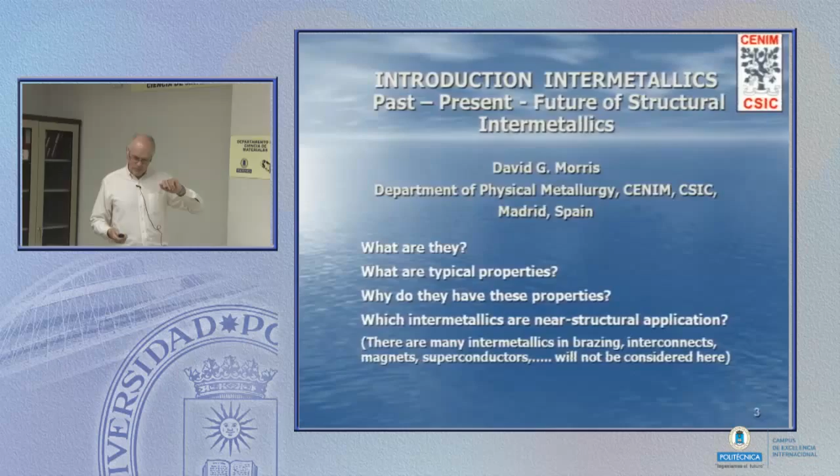Potted, English first of all. Potted means a little bit like what you put in a jar of marmalade - you take the chunks and throw them in, and everybody's contained within that environment.

What I want to do today is go back over the last 50 years, but especially the last 20 or 30 years, and discuss what's happened with intermetallics. Intermetallics has been one of the most interesting scientific and productive areas over the last 20, 30 years.

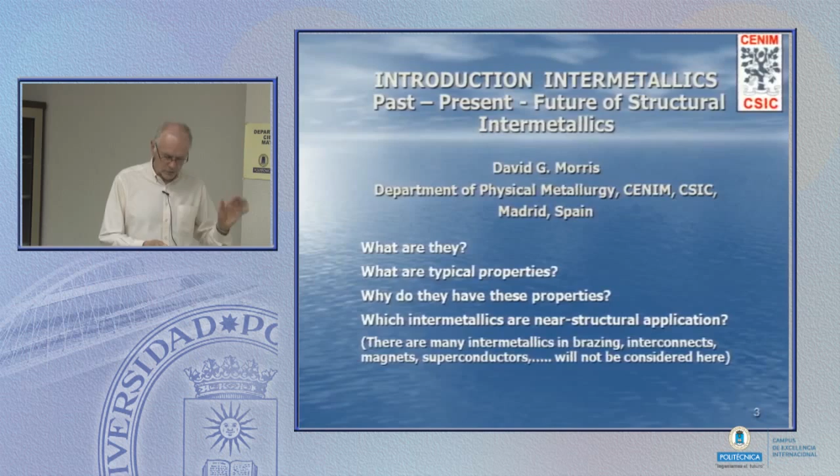I'd like to start with a brief description of what we mean by intermetallics, what are typical properties, why do they have these properties, and then look at a couple of intermetallics which are really close to or already in applications as structural materials. There are many intermetallics used for their physical properties - superconductivity, conductivity, etc. - but I'm not going to talk about those here today.

What are intermetallics? You all know about these gamma-gamma prime superalloys. In a gamma-gamma prime superalloy, you've got basically a nickel matrix, an FCC metal, and inside a very high volume fraction of precipitates called Ni3Al. Looking at the phase diagram, it's a mixture of the gamma FCC matrix with Ni3Al.

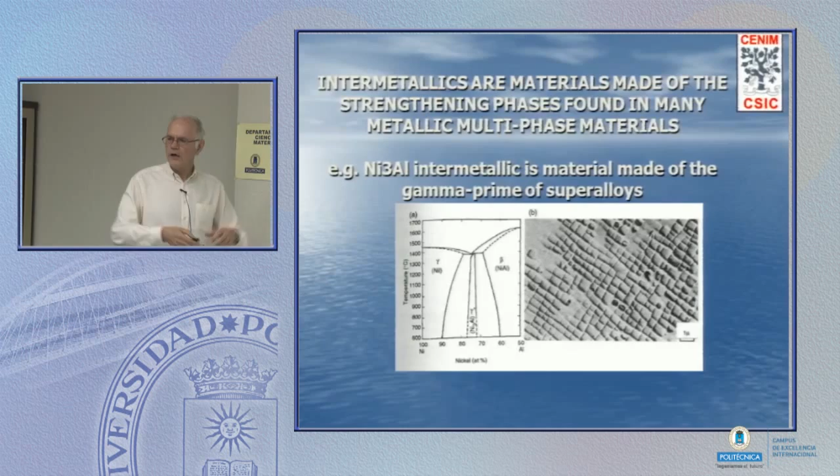What we're going to be talking about today is taking the material of the precipitates, and that's going to be our bulk material. Now, when we mix two elements A and B, a number of things can happen, and it all depends on whether you want to form AB bonds or not.

If I mix atom A and atom B, and they really don't care whether they are next-door neighbors or not, you'll get a disordered solution - that's what you've got in most conventional metallic materials, like aluminium alloys and steels. If you don't want to form AB bonds, preferring AA and BB instead, you'll have some sort of phase decomposition into an A phase, a black phase, and a white phase.

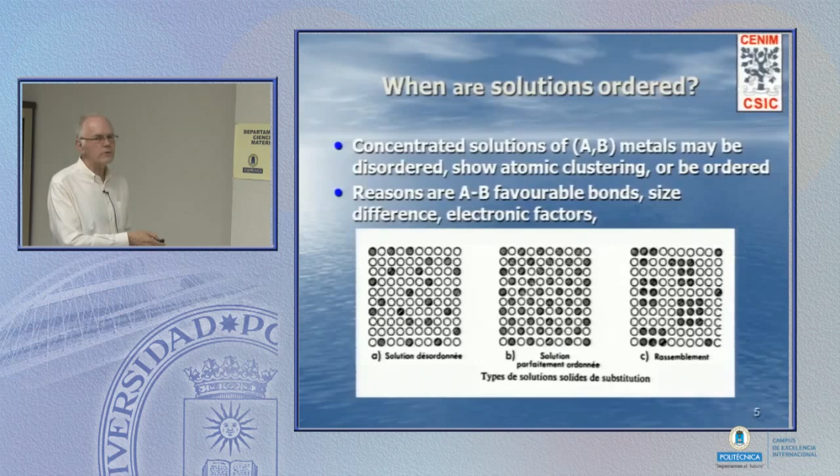Whereas if you do want to form AB bonds, the way to do it is to order the atoms, and the reason for the ordering can be size-related or electrical or electronic. A large atom wants to have a small atom as a neighbor so they can fit together spatially. So if we want to form AB bonds, we're going to get an ordered structure.

Now, a couple of definitions. Intermetallic compounds, strictly speaking, are those which remain ordered up to the melting point - they're strongly ordered and don't want to disorder in the crystalline state. Ordered alloys are alloys which at low temperature are atomically ordered, then they disorder, and only somewhat later, at a much higher temperature, will they actually melt.

A second definition: Daltonides. Many intermetallic compounds were discovered by chemists in the 18th century when they were mixing metals together and finding strange properties at strange compositions. Dalton is one of these famous chemists, and he found that at certain strict chemical compositions you would have a sort of chemical reaction and form a compound with a well-defined chemistry, like A3B2, and so on.

There are many others called Berthollide compounds, where you can have a wide range of chemical compositions and still maintain the ordered structure. Now today we're going to mix all these together and call these intermetallic compounds.

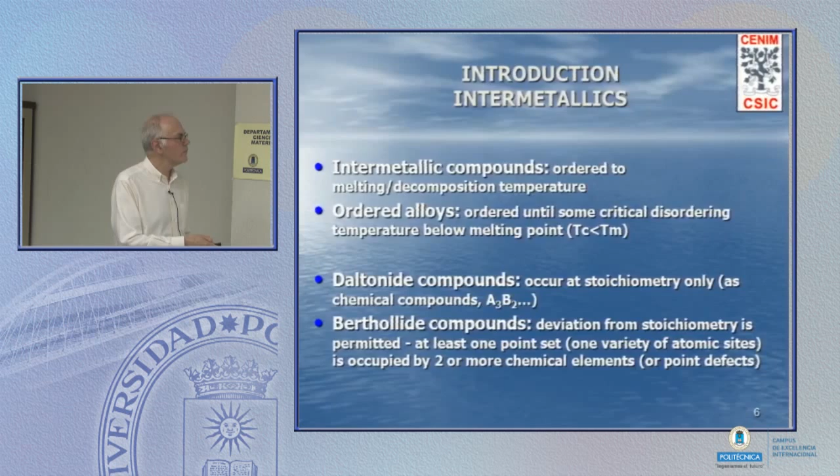If we look at a couple of examples of phase diagrams, this is the nickel-aluminium phase diagram again. Here's the nickel end, solid solution nickel. Here's the Ni3Al intermetallic. You see it exists over a fairly narrow composition range and is ordered all the way up to melting. Here's another compound, the NiAl. It's got a different crystal structure, a different phase.

It's ordered over a fairly wide composition range, again all the way up to the melting point. It's very strongly ordered. If we contrast with the iron aluminide, here's iron aluminium. Here we've got the FeAl phase region, ordered up to about melting over a wide composition range, very much the same as NiAl. But in this case, at Fe3Al, we've got another phase which exists over a moderately wide composition range, ordered only up to about 550 centigrade.

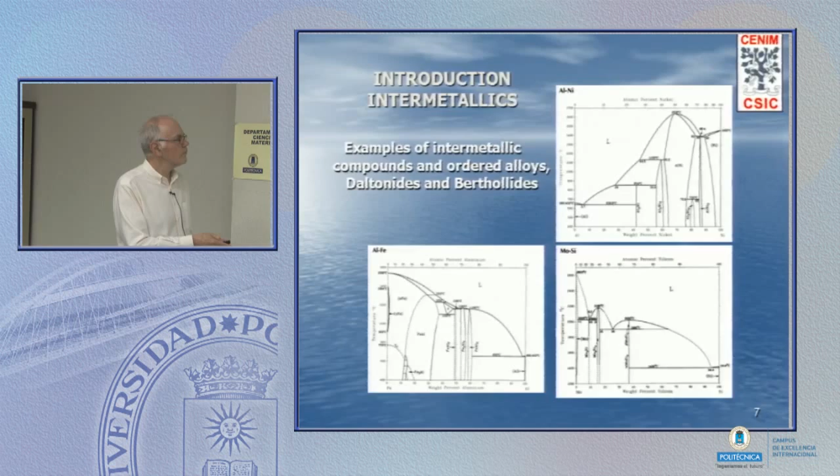Okay, now let's look a little bit further. Let's look at the electronic structure inside, and what we're going to say is that the intermetallic is sort of halfway between the metal alloy, the disordered metal alloy, and the ceramic.

Now inside a typical metallic alloy, you're going to have a positive ion, the nucleus, with electrons in circular or spherical symmetry around it, and then you've got a cloud of electrons that are free to move, that give you conductivity. Inside the intermetallic, here we've got the ion in the center in the same way. We've got a cloud of electrons.

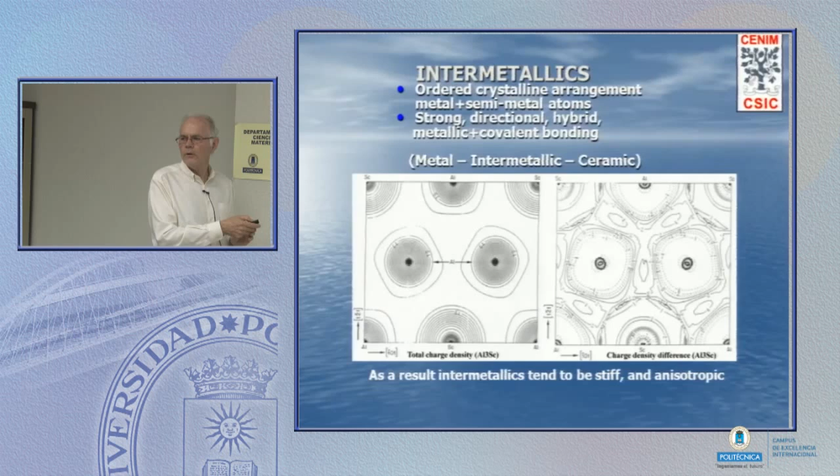These are still metallic alloys. They conduct heat and electricity. But what you see is that we're no longer circularly spherical symmetry. We've got a stiffening of the bonds and a directionality of the bonds. So we are, as you see, in between metallic, non-directional, rather weak bonding, and ceramic, ionic or covalent, strong directional bonding. We're sort of halfway in between.

Now if we look at the crystal structure, here's the BCC crystal structure, which you would find of iron, of steel. In that case, each atom would have the same identity. And this vector from the corner to the center, the half 1,1,1, is the easiest vector of shifting. That's the vector of the dislocation that carries out deformation.

Now in the ordered cell, we've got iron on the corners, aluminium in the center. A half 1,1,1 vector takes a black atom to a white site. It disorders. And the crystal doesn't like that. It likes to stay ordered.

We've got two alternatives. We can double up. Instead of having a half 1,1,1, we have a full 1,1,1 vector. Or we can go to a 1,0,0 vector. In both cases, they're larger vectors. Energy of dislocation goes with B squared. So they're much more energetic. They're more difficult to produce.

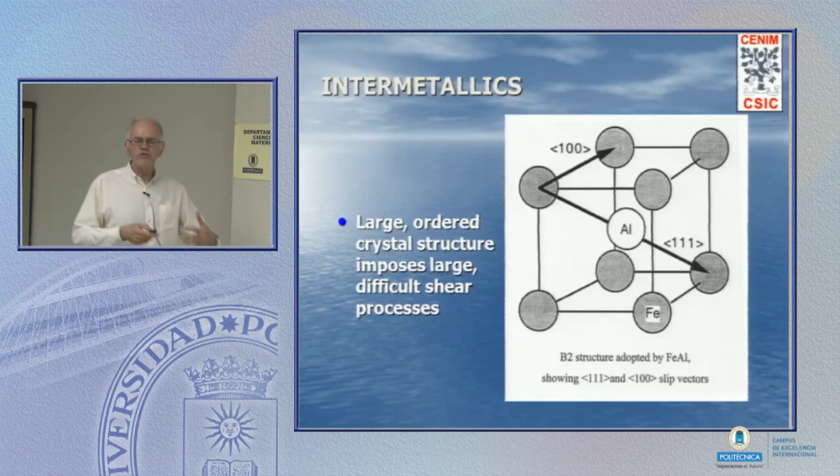And what we've seen is that here's an AB ordered matrix. Here's one dislocation, and ABAA. This is the disorder behind it. What do we do? I couple the one dislocation with a second one that repairs the order. And this is the super dislocation.

Now there are various types depending on the precise crystal structure and what sort of stacking fault. It's very much the equivalent of two Shockley partials with a stacking fault in between. The type of dislocation I get depends on the precise crystal structure, but in all cases the core of the dislocation is now not a point object, it's a planar object. You can think of it as a ribbon in three-dimensional space, which means it's more difficult to change plane. Things like cross-slip, moving a dislocation over an obstacle, is more difficult.

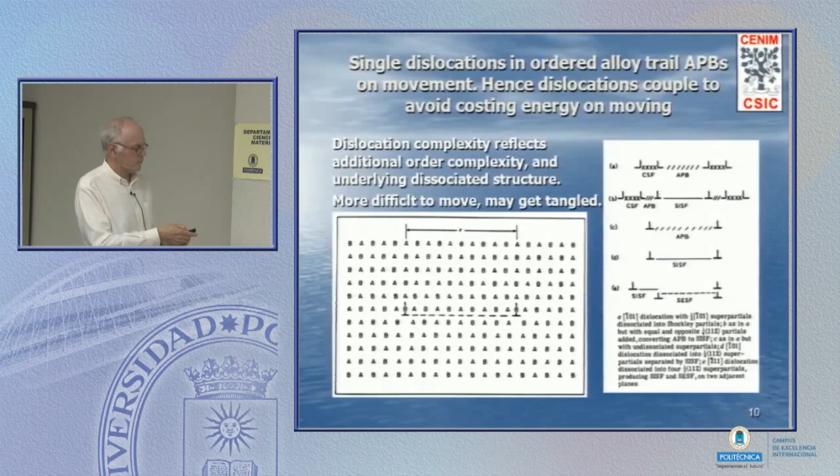Now if I look at the core of the dislocation, and this is a little bit esoteric, but I've put here in red, probably the most important characteristic of these dislocations in intermetallics, or if you like in ceramics as well. Here's a super dislocation made up of two cores with a stacking fault in between. And the cores plus that plane, the stacking fault, defines the plane of easy movement of the dislocation. The core itself is not a point object, it elastically relaxes. This dimension is something like 1 nanometer.

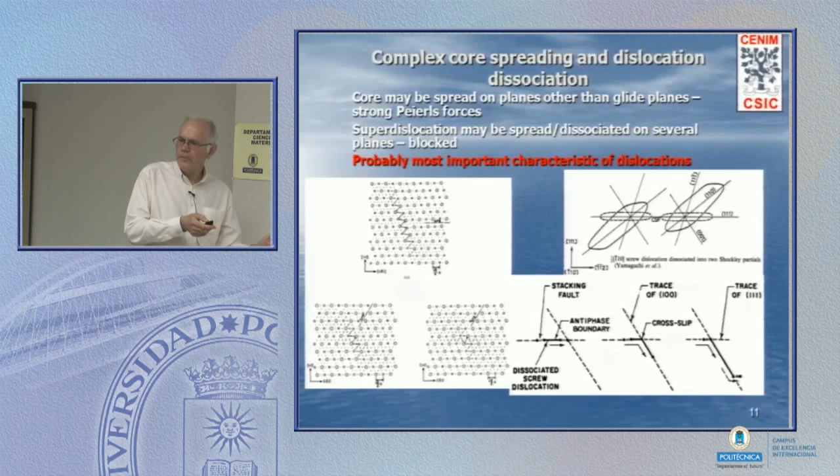The core relaxes over something like a nanometer, and because the elastic properties are anisotropic, directional, stronger in some directions than others, the core spreads out in the elastically most floppy, weakest direction. So the core looks like that, and here it looks like that. The dislocation is now this three-dimensional object. There's no easy plane. I need thermal activation as well as a lot of stress to move it.

Creating the dislocation is more difficult because of the larger Burgers vector, and moving it, because of this core - this is the Peierls stress - is more difficult. Now if creating and moving is difficult, the good news is that I've got a stronger material.

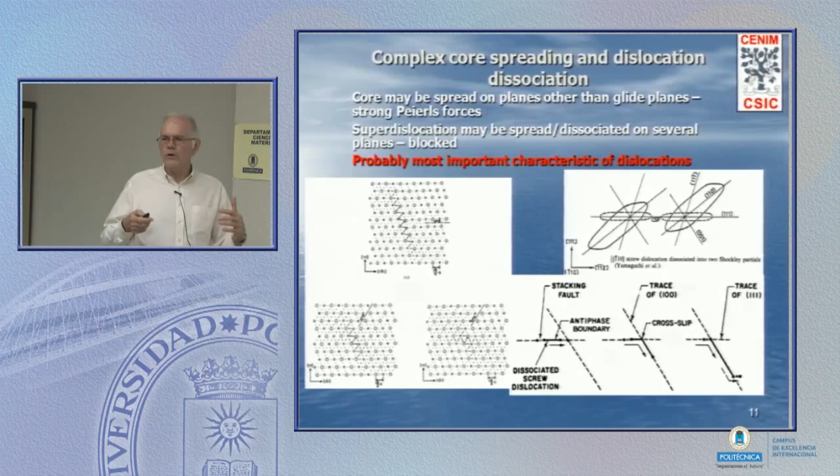Now the bad news is that, as a ceramic, the core makes it difficult to move a dislocation. In the ceramic I may become brittle because of cleavage cracking. In the ideal case, a cleavage crack is atomically sharp, and we break bonds one by one as this cleavage crack propagates forward. So it's very brittle - that's what silicon is, that's what iron is, that's what intermetallics tend to be.

So here we've got some ab initio modeling showing what may happen at the crack tip. If we want to go from really brittle to being more and more ductile, what we need to do from the crack tip is nucleate and shoot away, throw away a dislocation. If we can throw away a dislocation, we blunt the crack tip, it becomes more difficult to propagate further, we've increased the toughness, and eventually we become ductile.

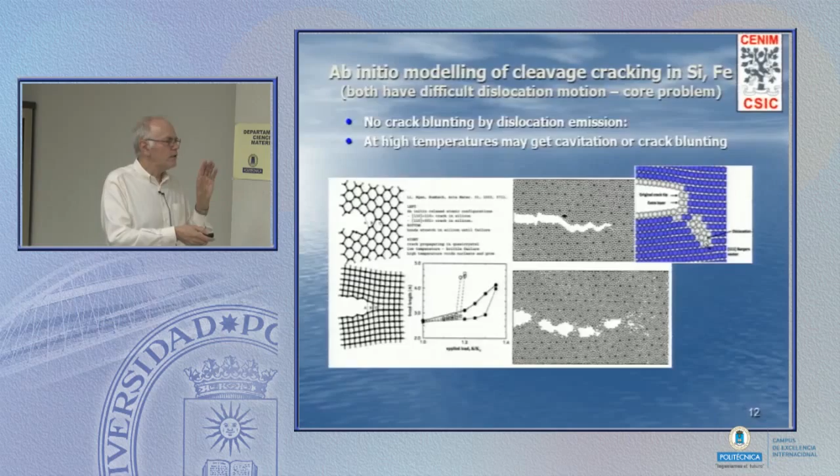Now the Burgers vector was twice as high, something like that, so the energy is four times as high. Moving it away is difficult, and because it's difficult to nucleate and throw away, there's a risk of, with high strength, low ductility.

What else does order do for us? When we talk about an atomic process like diffusion, what we're talking about is swapping a vacancy with the next door neighbor. Now if I have a vacancy in an ordered lattice AB, AB, AB, and I want to move the B atom, swap it with a vacancy, I'm going to move the atom onto an A site. The crystal doesn't want to do that, so anything that depends on atomic movement is slowed down. Diffusion is slowed down.

Here's an example of creep under conditions where the creep rate depends on the diffusivity. This is creep rate as a function of reciprocal temperature. At low temperature, we're highly ordered and diffusion is slow. When I reach a temperature where this alloy disorders, suddenly the diffusivity, and so the creep rate, increases by 2 or 3 orders of magnitude.

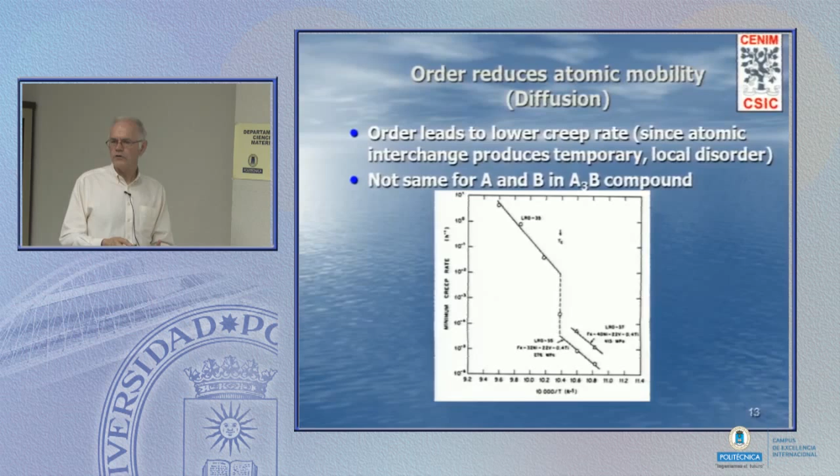Anything that depends on atomic movement will be delayed inside the ordered state. And again, if I'm looking at a high temperature application, lowering diffusivity as well as making dislocation nucleation difficult is good news. So summarizing, it comes from the strong bonding and the difficulty of dislocation nucleation and motion. We're elastically stiffer, we've got higher strength for two reasons - it's a larger dislocation structure and the Peierls stress. High temperature strength, if we can pin dislocations, gives low diffusivity.

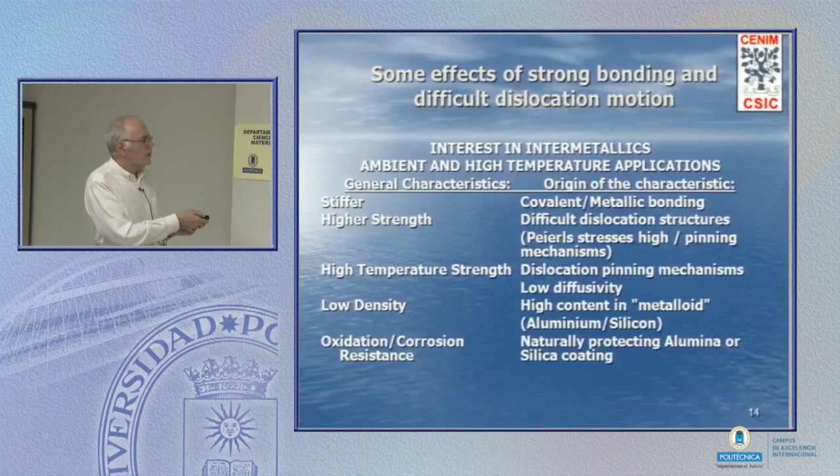Low density - what I've not said so far is that what we're always doing is mixing, in the structural applications at least, a transition metal with a light metal, especially aluminium or silicon. So if I mix a lot of nickel or iron with aluminium or silicon, I've got a much lower density alloy. And again, since we have a lot of aluminium or silicon, we're going to form a naturally protecting alumina or silica scale.

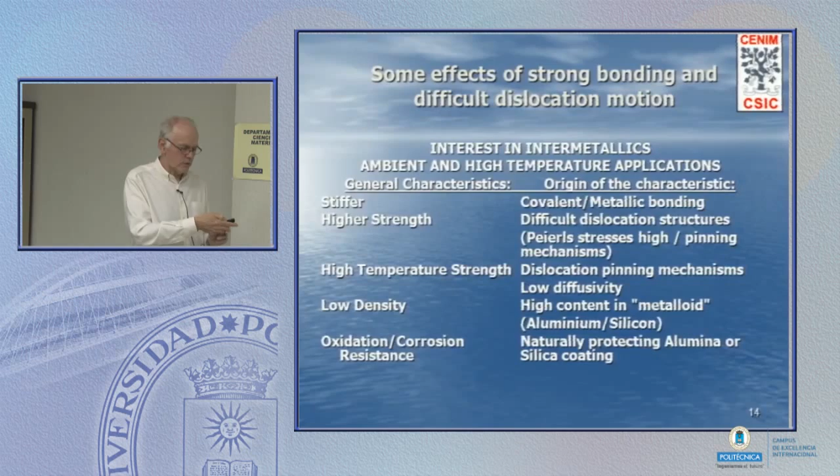So a couple of maps show typical changes of properties because of these elastic and structural reasons: the strength and the density. Here we've got steel, typical strength, typical density. Here's iron aluminide - I've put in a lot of aluminium, the density has come down a lot, the strength has not changed very much, actually. Nickel alloys and NiAl, titanium alloys and TiAl - in very general terms, the strength has not changed very much here, but the density has reduced.

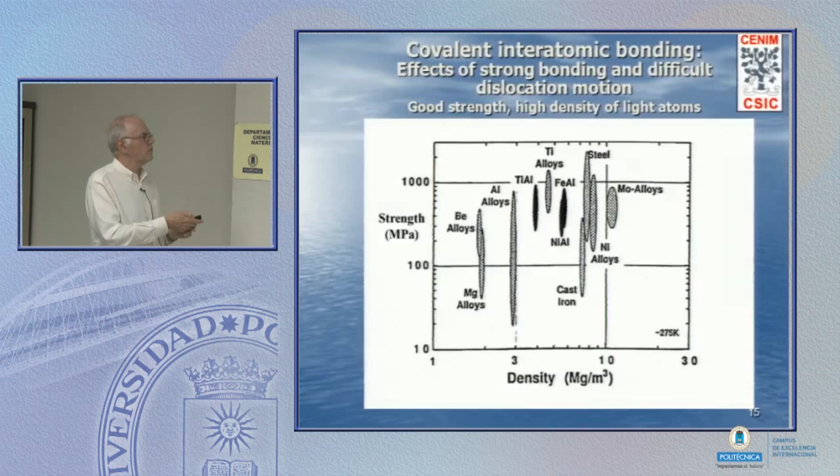Toughness and Young's modulus. Here's steel - the steel's range of toughness, and here on Young's modulus, typical modulus around 200 GPa. Here's the iron aluminide - toughness has come down somewhat, depending on which aluminide you're looking at, and stiffness has gone up. Titanium alloys and TiAl - we're always increasing modulus and lowering toughness.

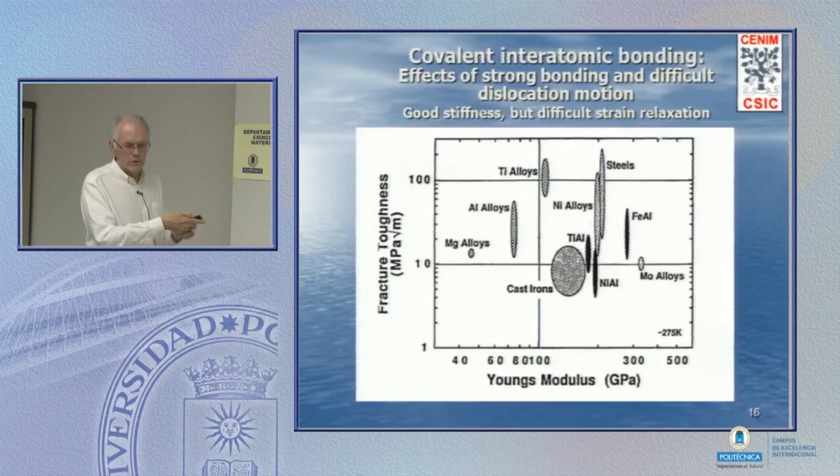So the good news is that we have the possibility of increasing strength, oxidation resistance, stiffness and so on. The bad news is watch out, especially for ductility, and also creep resistance is sometimes not too good. This has been the big problem over the last, let me say, about 20 years. Really, solutions have been found by macro and micro alloying, changing and adjusting the chemical composition, by adjusting the mixture of phases, as well as going to careful processing.

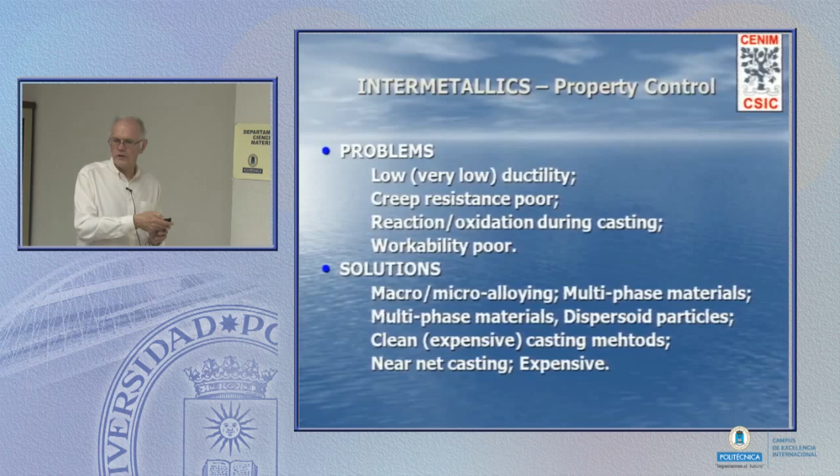Why are we interested? Here's a statement made by the Advisory Council for Aeronautics Research, now about 15 years ago in Europe. There's a big problem, this statement was made in the context of aero engines. We're worried about CO2, we're worried about these other pollutants. We need to do something, we need to do a lot in terms of energy efficiency. You can go a long way through engineering, but if you want to achieve this sort of improvement, you've got to go to new materials. There's absolutely no question of doubt.

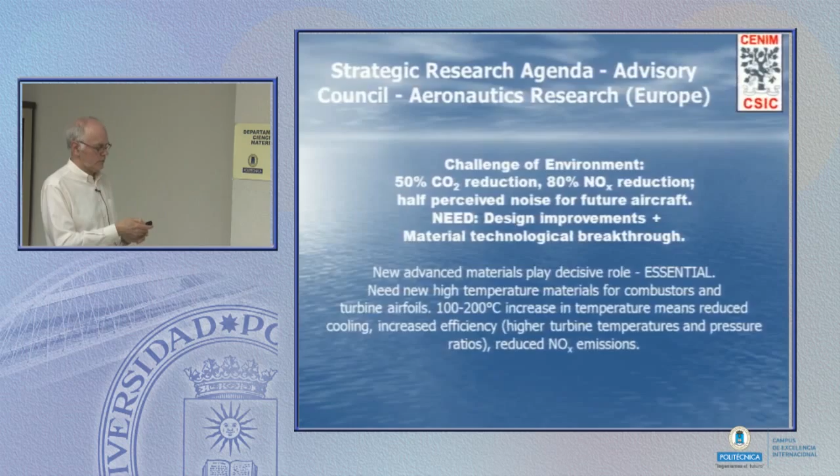Now, what are the materials we're using for high temperature structural applications? Specific strength is typically more important. If you're rotating a turbine, it's the density that plays a role as well as the speed at which you're turning. If you're flying, again, weight is important. So specific strength we're looking at here, strength divided by density, depending on the operating temperature. This is where the titanium alloys are found, here at the high temperature single crystal superalloys.

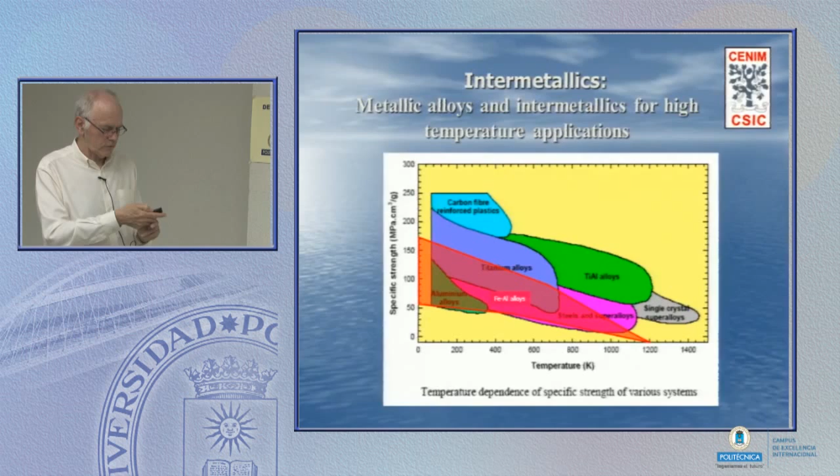Here's what TiAl could be compared with titanium alloys. Here we've got steels, and here we've got iron aluminides on top. So what I'd like to do now in the remaining time is look at a couple of important intermetallics, see why they're important, what's been done to their development over the last couple of years, and where we are in terms of applications.

First of all, the gamma TiAl, this is a light, stiff, oxidation resisting material, but it's also brittle. There are many dislocation varieties. They're not all terribly mobile because of the Peierls stress problem.

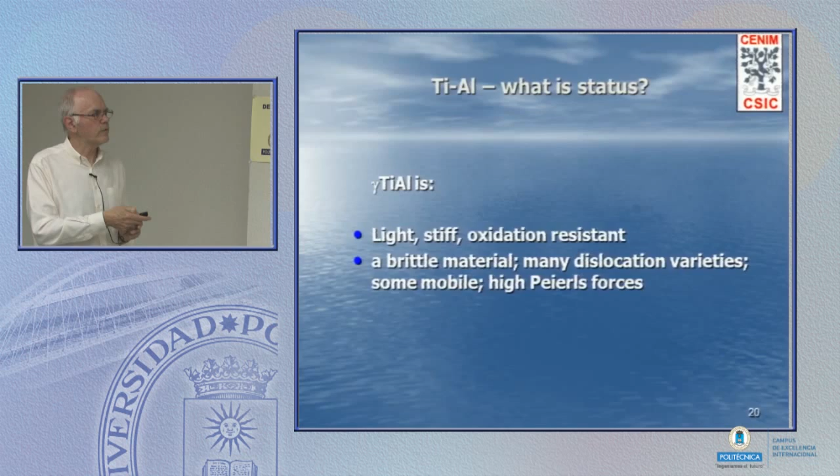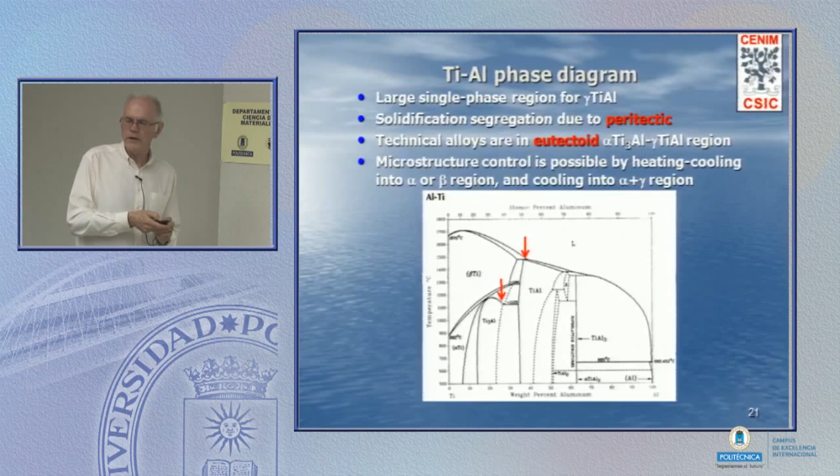Those that know about steels know that you have a eutectoid transformation, and what steel people do is heat their material up into the high temperature gamma, the austenite phase field, and then cool it down to obtain pearlite or martensite or whatever. The eutectoid temperature offers you the ability of heat treatment for microstructural control and then property control.

It's very important. Now, here are the two types of microstructure you can get simply by heat treating. This is one of these alpha-gamma alloys. Simply by heat treating the final object after machining, after forming, after everything you want, we heat it up to high temperature, cool it down relatively quickly, or cool it down rather slowly.

Here what we've got are grains, something like 25 microns in size. Within them there's a lamellar structure. It's exactly the equivalent of pearlite in steels. Or if I cool very slowly, here I've got globular grains of gamma with, at the grain boundaries, large chunks of alpha-2. And it's very easy to heat up the material again if I want to, and cool down in a controlled manner to achieve this structure and these properties, or this and this.

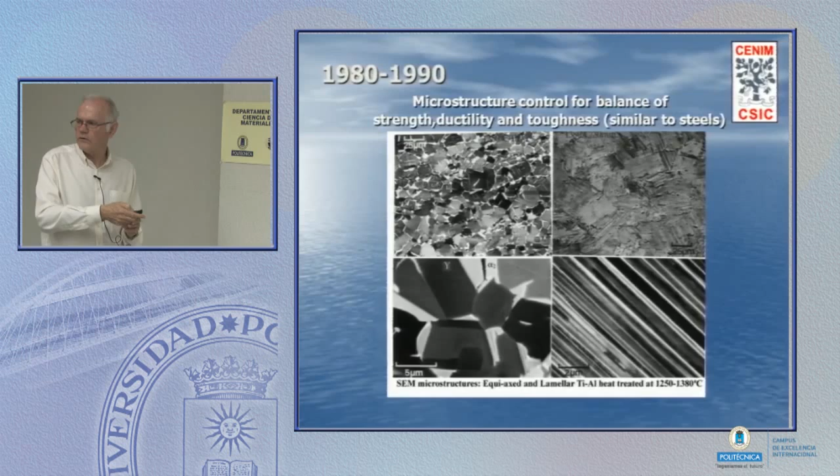Now, what's happened, this is maybe 1990 to 2010. There have been changes of processing technique and changes of alloy composition.

Titanium plus aluminium is very, very reactive when you heat it up towards the melting point. It reacts with the crucible if you're trying to melt it, it reacts with the environment. So there's been lots of development of plasma, cold hearth, under vacuum. There's been the development of techniques, very much as you have for titanium alloys, but going a little bit further.

And in terms of chemical composition, the balance of aluminium against titanium tells us how much of the Ti3Al, the alpha, and how much of TiAl, the gamma phase, we'll have in the mixture. And then adding chromium, manganese especially, we improve ductility.

Adding things like niobium, tantalum, molybdenum, we improve oxidation resistance because we want to use these at as high a temperature as possible. And then adding often interstitial elements, we improve the creep strength.

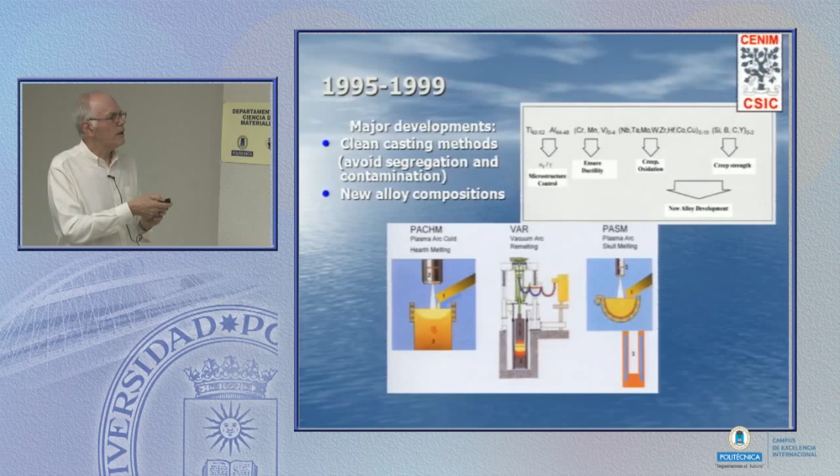Over the decades, there have been a number of phases or stages of research development. The very first phase said, let's have a look at TiAl, single phase. It's very brittle, even though it's got some properties, very brittle.

So we jumped very quickly to this alpha-2, alpha Ti3Al plus gamma TiAl mixture. And as in a composite, we get ductility from the one phase, we get strength from the other, and we mix the proportion of the two according to how much ductility, how much strength, how much toughness do we want.

Then we need to improve creep and oxidation, so we add these BCC metals. Then there's this problem of the peritectic solidification.

It means that the composition changes greatly within the one alloy. And that will affect, in one part of the alloy, the same component, you may be here, in another part you may be there. That's not allowed.

And so adjusting the composition by careful adjustment of these, avoiding the peritectic solidification and avoiding the segregation problems that go with it.

And then this lamellar structure is very often the structure that we want. It decomposes during a long time at high temperature, so the properties change, and so we have to do something about that.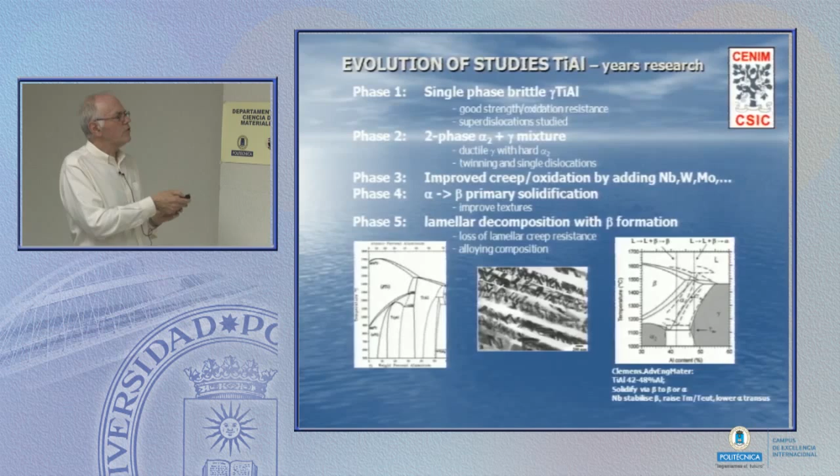The creep problem has been a great problem after having developed alloys and structures that had suitable strength and toughness and so on. For the reason that we see here we're looking at the creep rate as a function of time or strain. We're creeping at 700 Celsius.

Let's add a stress of something like 300, 350 megapascals. What we see is that the creep rate is enormously high for something like 1% strain, and then the material work hardens and the creep rate becomes acceptably low.

But of course, if you think of a turbine blade that's spinning inside a container, what we cannot do is to allow this component to stretch 1%. It's too much. And so avoiding this primary creep strain has been a great problem.

The reason it happens is that within a given phase, it's very easy to emit twin dislocations or emit normal dislocations. And it's only when these interact that you have a sort of work hardening that the creep rate becomes very, very low. Until then, it's a very soft grain, it's a very soft material.

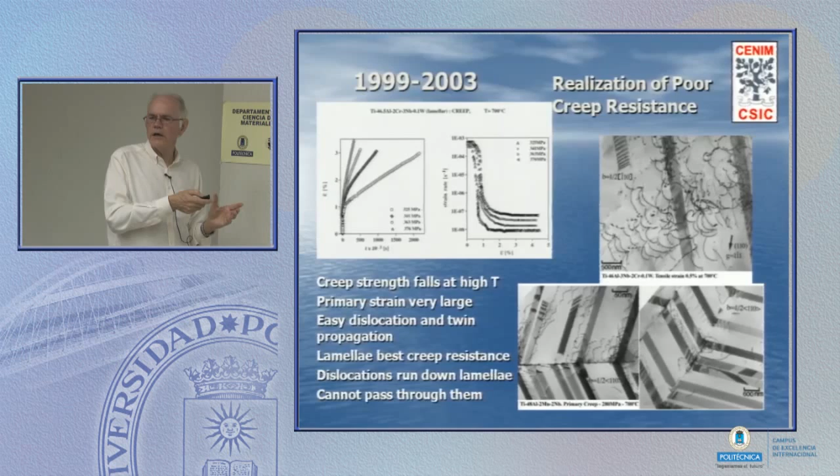Okay, so where are we today? By the selection of alloy composition, by the selection of type of phase and mixture of phase, we can balance properties.

If we want high fracture toughness, we go to the lamellar structure. If we want ductility, we go to the opposing, the duplex, the globular structure. If we want strength, lamellar and solution hardening. If we want creep strength, fine lamellae and precipitates. If we want oxidation, so today we essentially know within limits how to adjust.

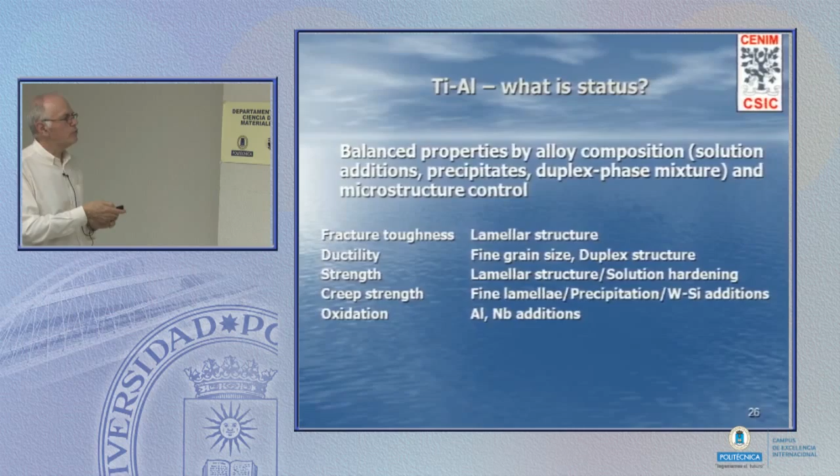And what's the status? The status is that we're into applications. Now here's a jet engine. This is supposed to be the GE90 engine.

Here you've got the various fan blades at the front where drawing in cold air, compressing it. Here we're burning it. And then out comes the hot gas. Here we've got the superalloys.

And here at the very back in 1-2 stages, today we've got per stage something like 100 of these low pressure turbine blades of one of the alloys. There's something like 20,000 of these blades flying, and they're flying inside the GE90 engine. Next time you go on a 787 or the upgraded 747, look and see if you've got a GE90, and if you have, you're flying titanium aluminide.

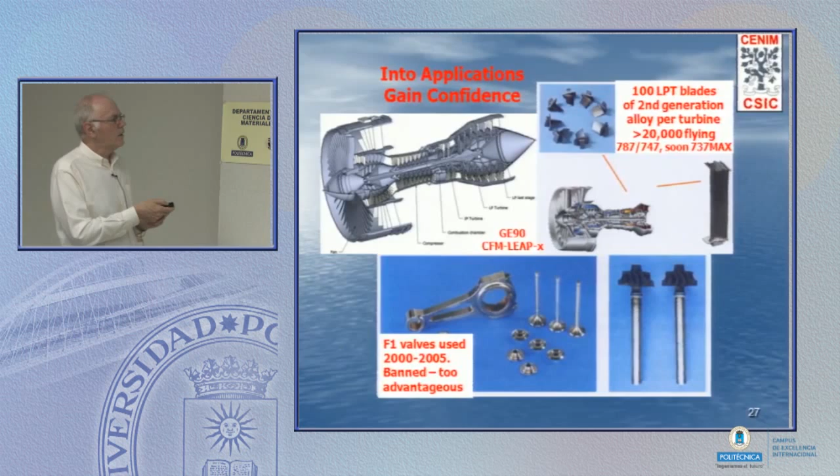So that's a good success story.

Now, in the same way, these valves were used in Formula One racing engines from about the year 2000 to the year 2005, and then they were banned. And they were banned because, now, clearly in this case, you're rotating a component as fast as you can. Here, you've got something oscillating and closing. So if you can make this of a low density material, you've got an engine that is more efficient.

It was so efficient that it was banned. It gave too much of an advantage, as has happened this year with Formula One, you can't make these engines too efficient.

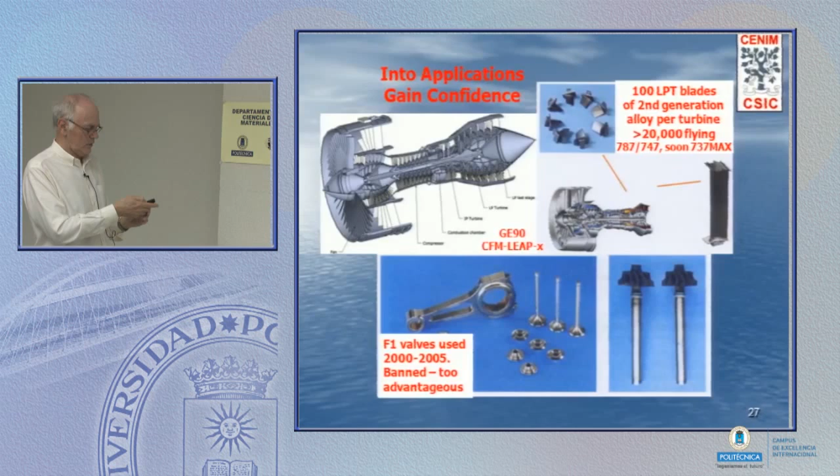What does the turbine blade want? It wants a balance of properties, a balance of composition, a balance of microstructure. You need high cycle fatigue strength at high temperature especially, low cycle fatigue at high temperature, and room temperature is also important because you've got to switch the turbine on at some stage. Creep you need, ductility you need.

This has been a great success story of education of the design engineer. The design engineer working with these turbine blades uses very exotic material but is often a very conservative person, used over his lifetime to working with superalloys that have maybe 5% ductility. When told to work with 2% ductility, it seemed impossible. Now he's working with 1% ductility. That's been a great educational story, convincing the engineer that 1% ductility is all you need.

The turbine blade drops on the floor, you bang it gently with a hammer when nobody's looking and put it in - that's where you need 1% ductility. Domestic object damage means if a bird flies in the front end, you don't want to spit out too many broken blades at the back end.

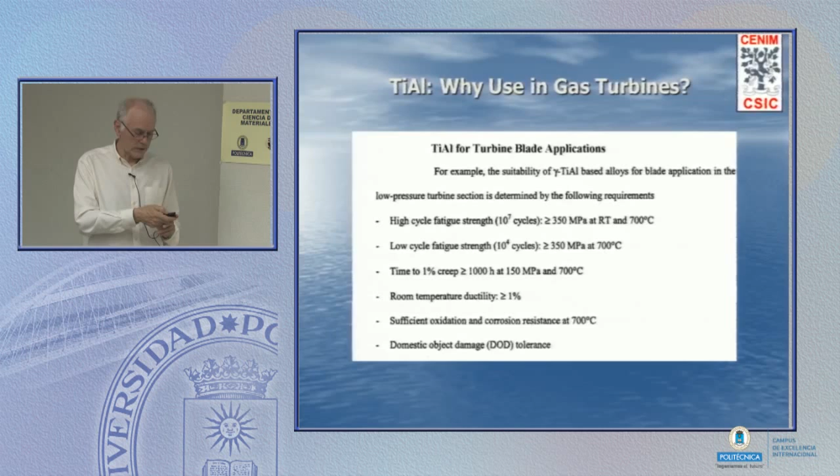When we look at the exhaust valves in the engine, very much the same properties apply: high temperature, high cycle fatigue, oxidation resistance, wear, etc.

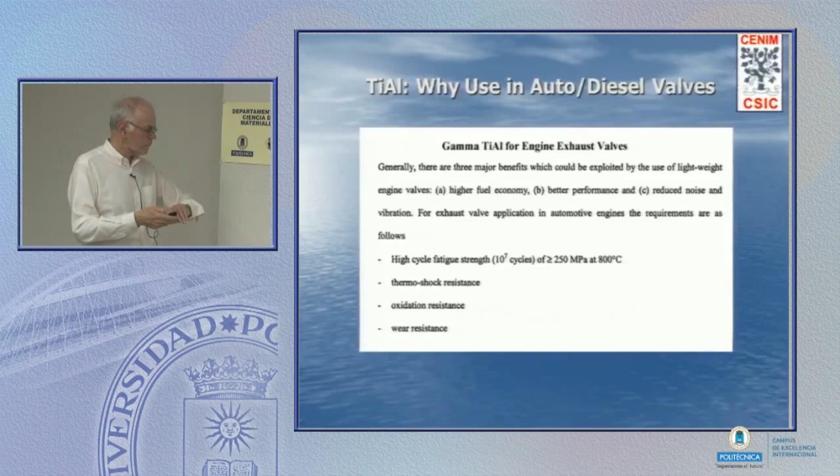Let me jump to another family, the silicides. This is the molybdenum-silicon phase diagram, and we've seen before we have a couple of these Daltonide compounds, very strongly ordered intermetallics. Peierls stresses are so high dislocations are not going to move - don't bother about the word ductility. You need to use the toughness concept as you do for ceramics. They don't deform plastically, but they are metallic, so they've got high thermal and electrical conductivity.

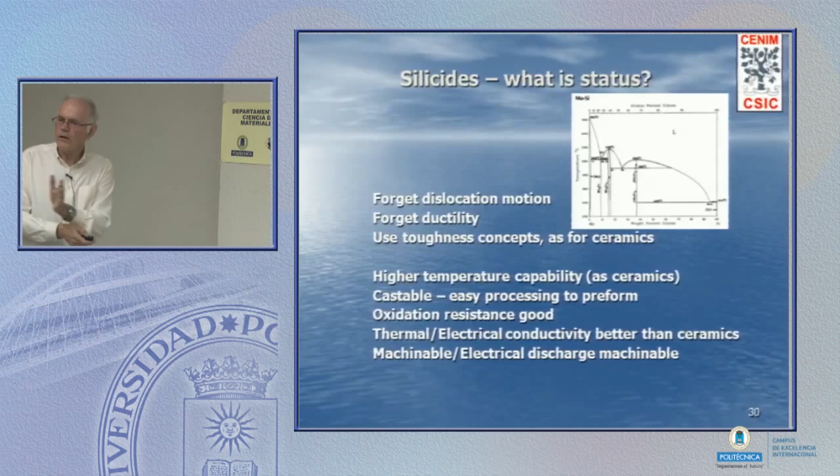High thermal conductivity means you can cool them actively, which is a significant gain over the ceramic. Electrical conductivity means they can be electrical discharge machined, as you cannot with ceramics. They're castable, they are metallic alloys - you can mix them up in the liquid state and cast them to shape. Oxidation resistance is very good, and we're moving further than TiAl towards ceramics.

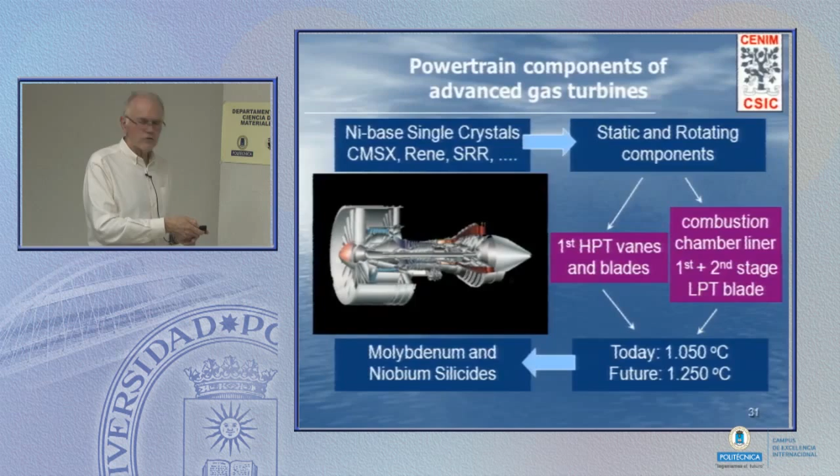What's the interest? The great big success story of gamma prime nickel-based superalloys, perhaps of the cobalt superalloys as well, has been a tremendous success in the hot zone of the jet engine. These alloys have an upper limit of operation temperature of 1,000 degrees and a little bit more. What the turbine makers are hoping for, with molybdenum silicides or perhaps niobium silicides - maybe more British with Rolls-Royce, more American with GE - is that these silicides will jump up to significantly higher temperatures, temperatures where superalloys have, if not yet molten, become extremely soft.

You know this story: the upper temperature limit of usage of superalloys has evolved over the years, over the decades, through evolution of composition, evolution of processing - cast, wrought, directionally solidified single crystals. But what is clear is that superalloys are not going to gain very much more in terms of temperature, whereas just around the corner, we're almost there, supposedly, with these silicides.

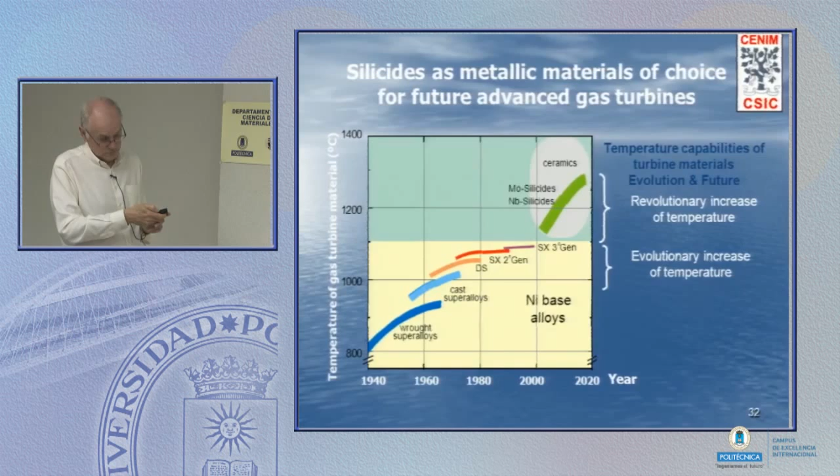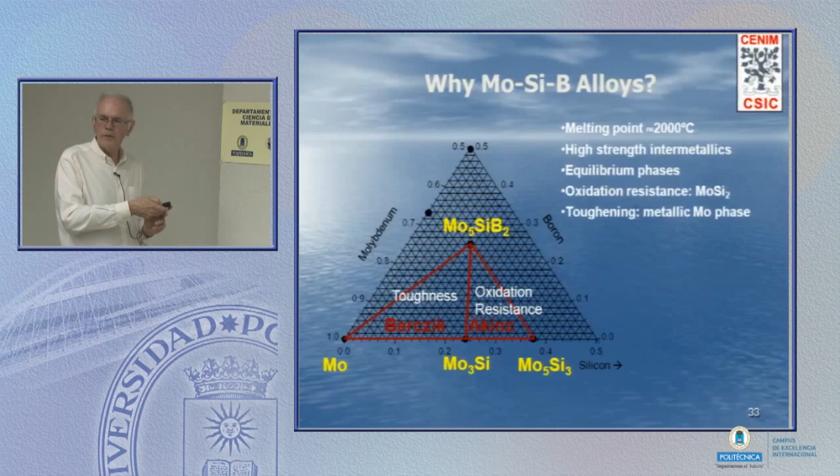Here are two microstructures, I think both cast materials, one with about 40% of the molybdenum phase, one with about 50%. Toughness is something like 8, perhaps 10 megapascal root meter - for those of you that work with ceramics, it's pretty much ceramic, maybe a little bit better. But of course it's castable, it's machinable, it's coolable.

Here we can do a tensile test at 1200 C with a yield stress of above 300 megapascals. The problem with measuring this is that all the dies, all the testing devices, have softened before you actually measure these materials.

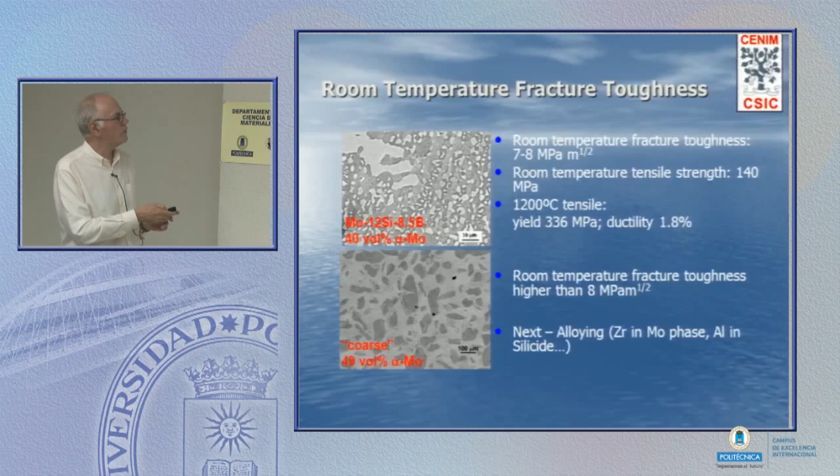These form a natural alumina layer that protects, so you don't need lots of chromium or lots of nickel to get the properties. They're very cheap in terms of basic alloying additions. We've got order strengthening and a high specific modulus - the modulus is a little bit higher than steel, and the density is much lower.

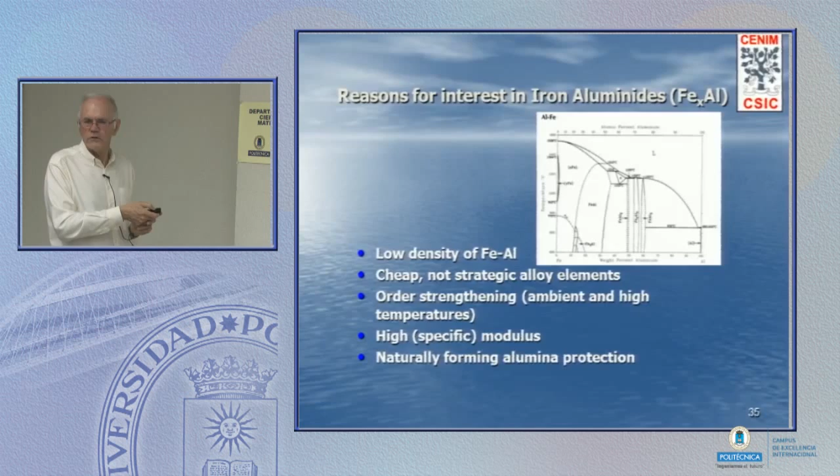And the reason for all of this, of course, is that we've made it difficult to nucleate the dislocation, difficult to move it away because of the Peierls stresses. And so the crack tip doesn't blunt.

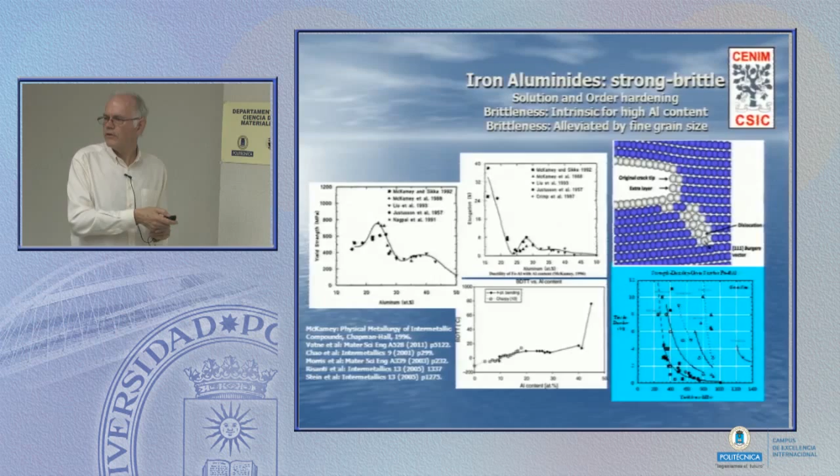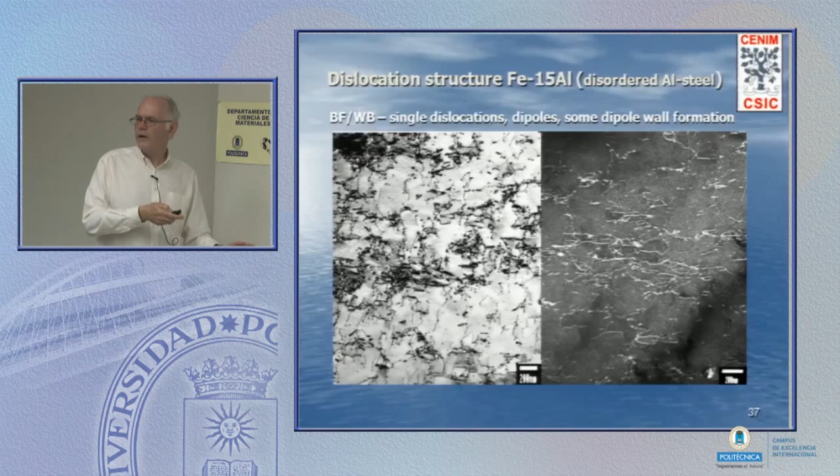Just to show you a couple of the dislocations we've been talking about. This is iron with aluminium in disordered solid solution, a small amount of aluminium, giving a disordered lattice very much like iron itself. Here we're looking in bright field and in dark field. What we see are single dislocations exactly as in steel, and perhaps the beginning of a dipole wall structure, with some dipoles and some debris in the background, exactly as if we were deforming pure iron.

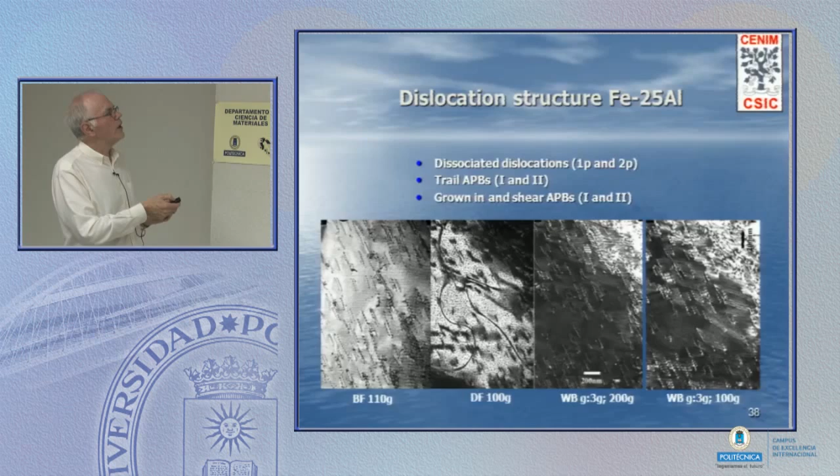Now if I go into the FeAl region, higher aluminium than Fe3Al, again I've got paired dislocations, super dislocations. But of great interest is that these can react together and decompose. They're very complicated dislocations, and here I've got something like a Burgers 1 dislocation and a Burgers 2 dislocation reacting to produce a Burgers 3. That is a little node that cannot be moved in any direction, so it's an additional type of obstacle.

Or here's a dislocation which, where it's bent over, is starting to decompose into two partials. Again, the partials don't want to move, so this is a pinning point. Now these sorts of pinning points...

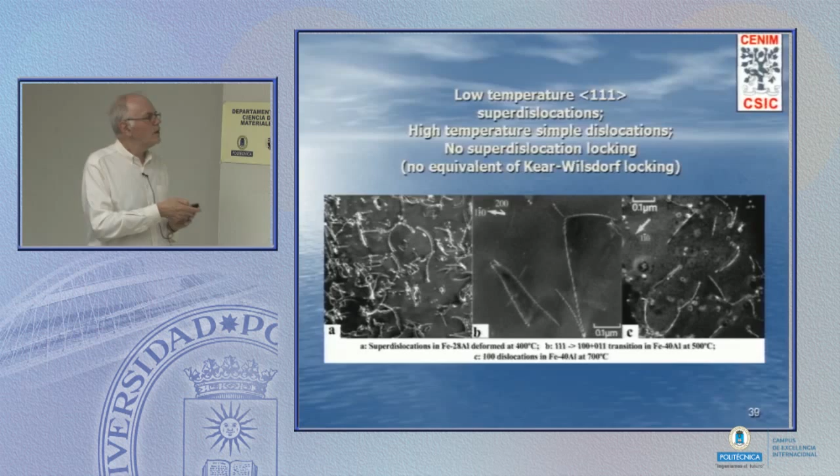give rise to what is a very strange behavior known as the stress anomaly, found in many of the intermetallics. It occurs because the dislocations are complicated. At low temperature they glide as much as they can, but at high temperature they react together, form nodes that are obstacles, or decompose to become unmovable objects.

So what we have is anomalous strengthening, which is very strange—that's why it's called anomalous. We have a material that, if I test it at room temperature, has a strength of 100 to 150 megapascals. If I test it at 600 Celsius, it has a strength of 300 megapascals. It's a wonderfully strange thing, a material that is much stronger at high temperature than at low temperature.

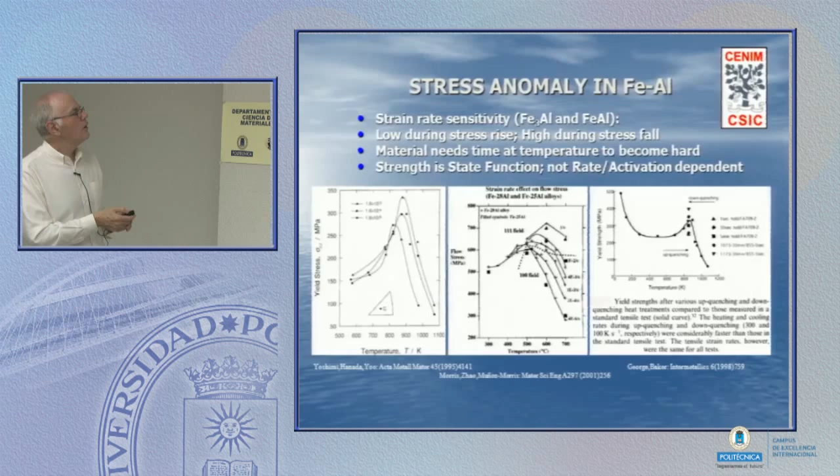Now, unfortunately, when we look at creep strength—and what I'm saying here applies exactly to all steels, since the iron aluminides are ferritic steels with a lot of aluminium—at temperatures below, what we're looking at here is the stress we can apply for a creep life of 1,000 hours as a function of temperature. If I apply a high creep stress, that's okay at low temperature, below about 500 Celsius, but when I get to 600, or especially 700 Celsius, the creep strength has come down enormously.

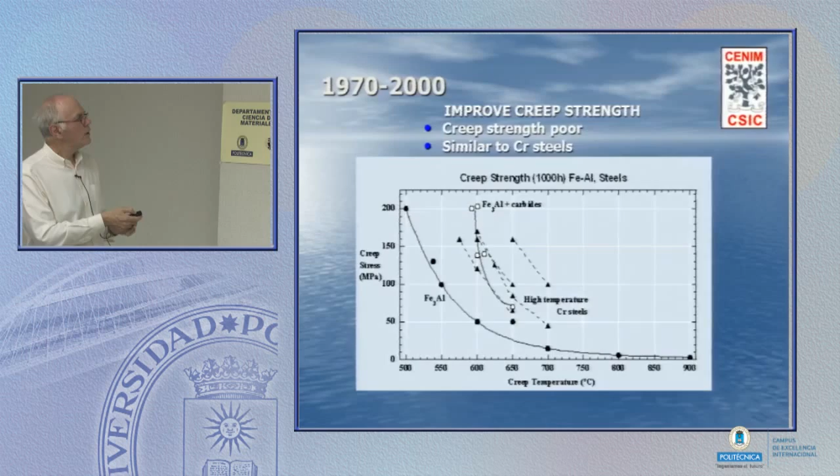So what do we do with steels? I do exactly the same with the iron aluminides: I add carbides, I add chromium as in steels, I add whatever obstacle I can to delay and slow dislocation movement. There's tremendous activity at the moment trying to improve steels that can function in the 600 to 700 degree range—it's a tremendous problem, and the same applies to the iron aluminides. There's been enormous activity on improving creep resistance of iron aluminides, a lot in Germany, a lot here in Madrid, and a lot in the Czech Republic.

You see here in this messy graph on the right, this is the creep rate for a given applied stress at 700 Celsius, for the binary iron aluminide adding chromium, with no strengthening particles. If we add titanium that forms particles, or boron, or nickel, or tantalum, or zirconium, all of these form second phase particles of different types that have better and better stability. So the strength has been improved by one order of magnitude over the last about 10 years.

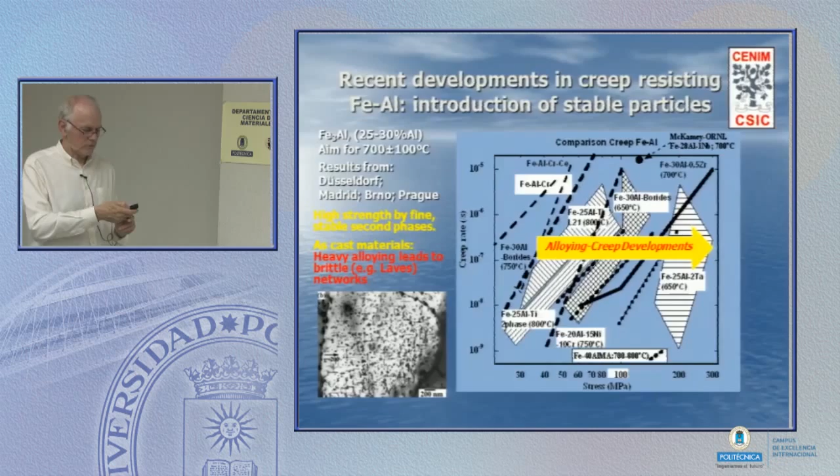Let me say a few words about the oxidation corrosion resistance. Here what we're looking at is the change of weight if I hold this material under cyclic testing at 800 Celsius.

800 degrees is a very high temperature for a normal chromium steel. Here's iron with 9% chromium. It cannot withstand 800 degrees, and it's oxidizing like mad. It's forming a very thick oxide film. If the film stays stuck on, it still isn't going to protect me. I'm going to consume all the metal.

Here's another example of iron 13 chrome with a little bit of yttria, and here it's oxidizing like mad, and the oxide is flaking away because of the thermal shock we're putting on. These alloys here are all alloys that contain 15 and 20% aluminium. Adding in aluminium means that you oxidize, you form something like a nanometer thick oxide, alumina layer, and then you stop. You protect yourself.

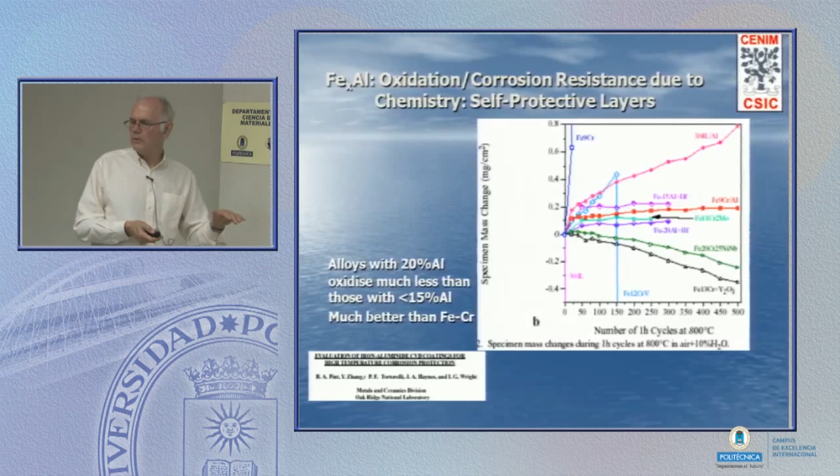Again, oxidation resistance. Here we're looking at the change of weight as a function of aluminium content. We're annealing this material at 600, 1000, or 1200 degrees. Now, you don't hold a steel at 1000 or 1200 degrees and hope that it's going to remain metallic. It's going to oxidize very quickly. And that's what we see. There's been an enormous weight gain. This will mean full oxidation to no metal remaining.

When the aluminium content is below something like 12 or maybe 15%, there's this enormous oxidation. The moment you're above 15 or 20% of aluminium, then you form a thin oxide layer which sticks, protects, and that's the end of the story.

And this alumina layer applies to oxidizing conditions, but also to carburizing and sulfidizing environments. There are very many industrial environments in the petrochemical area, for example, where you've got a carbon excess, you've got a dirty sulfur-containing coal. And all these aluminides are absolutely wonderful. They simply sit there and laugh.

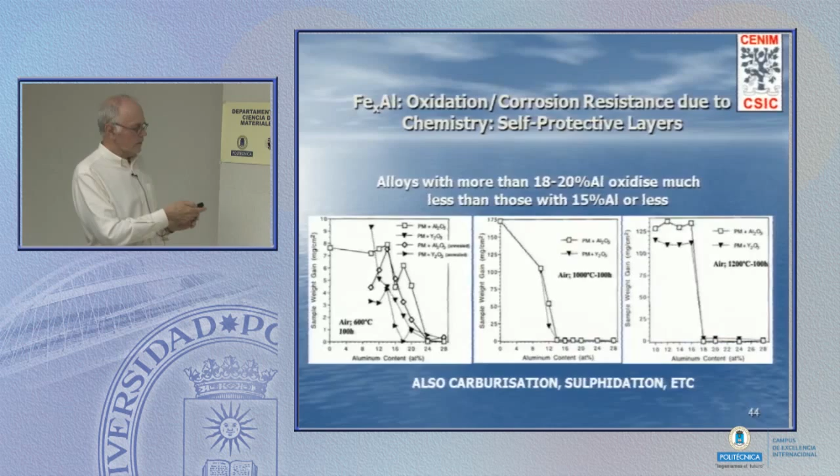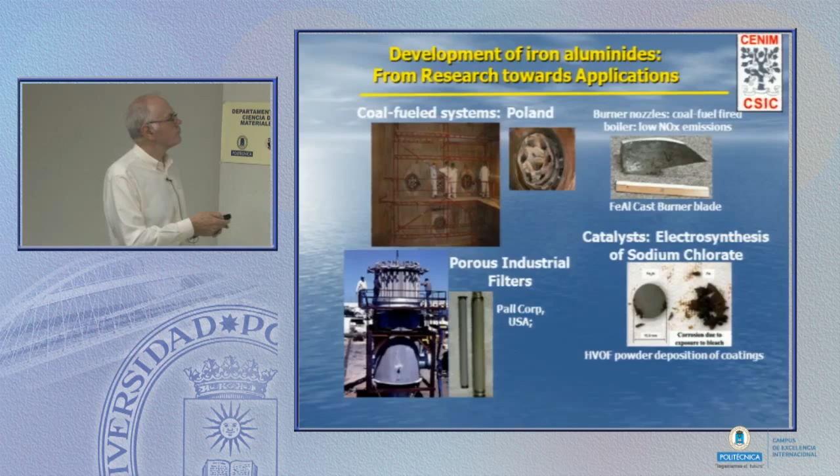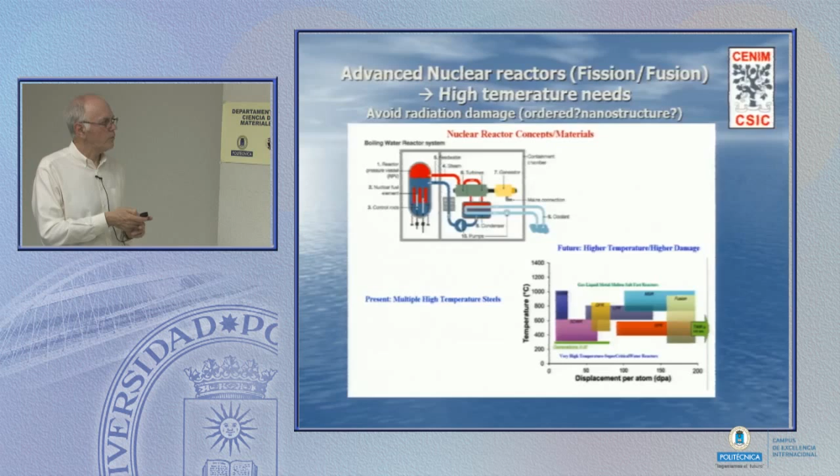And of course, at the present day and in the future, I've been talking about high temperature applications, very often inside a turbine, we're rotating. If it's in an aircraft, we're flying. But whether that turbine is found behind a nuclear power station, or behind this solar heat-powered station, in all cases, what we need for thermodynamic efficiency is to get to as high a temperature as we can manage. Efficiency goes up.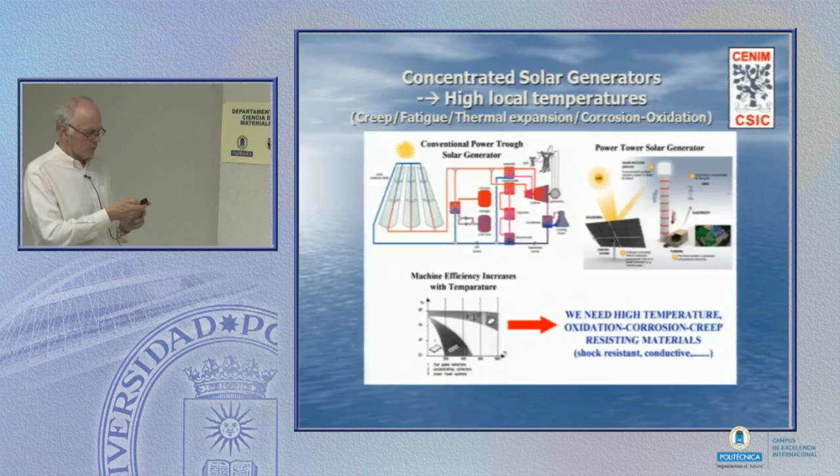So a material, whether it's a silicide, whether it's an aluminide of titanium, of iron, in all cases what we need is resistance to creep, resistance to fracture, resistance to oxidation, dirty attack in the industrial environment. So with that, let me finish. That's where we are. We're at a stage where essentially research is finished. I mean, the answers are there. We know that you need to have a multi-phase mixture because you have multiple demands for properties.

You need oxidation resistance, but also creep and toughness and so on. The world is learning that when it has to, it must accept low limits of ductility, and engineers are beginning to move away a little bit from the dogma of 'this was what we always thought we needed' to 'this is what we can actually get away with.'

We need medium-fine microstructures, depending on whether it's really creep-controlled or ductility-controlled for the application. Often we have a ductile matrix, which is environmentally resistant. With titanium aluminide, which we don't have with the other intermetallics, we've got this option of high temperature workability and low temperature usability.

Structural stability has been a problem, especially when we're looking for creep resistance, but the problems have been essentially solved. You can cast these materials, watch out for segregation. And the story has been one of composition control, but it's really been one of microstructure control - control the mixture of phases and the size morphology.

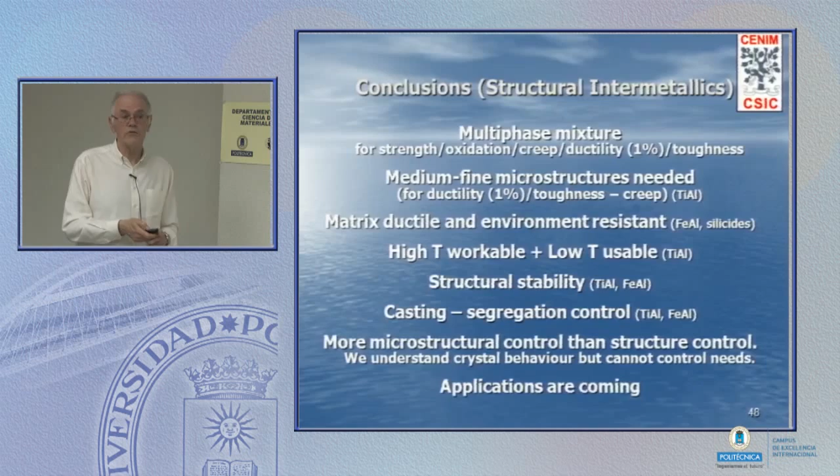And the applications are here, and I think over the next decade we're going to see more and more of that coming. So with that, let me thank you all for your attention.